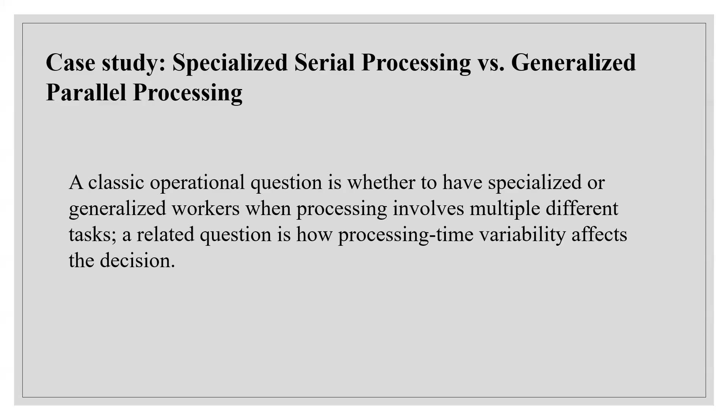Let's consider a loan application office, where applications arrive with exponentially distributed inter-arrival times with mean 1.25 hours. The first application arrives at time 0.

Initially, the system is empty and idle, and we will run for 160 hours. Output performance measures include the average and maximum total number of applications in process, and the average and maximum total time from entry to exit that applications spend in the system, as well as their time waiting for the next processing step to begin.

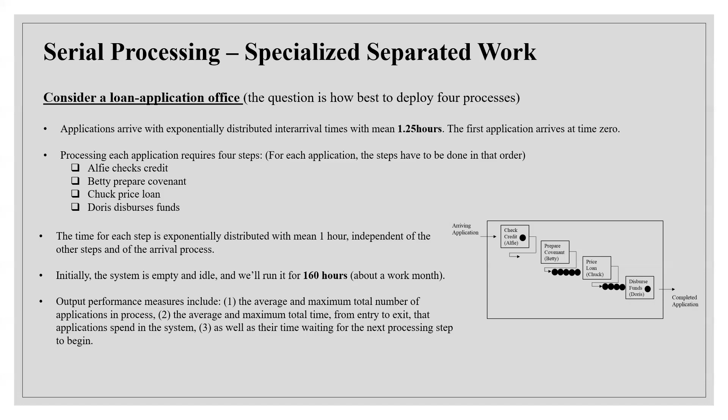So how do we use Arena software to simulate this process? Let's first open the Arena software.

As I mentioned before, the simulation always starts at the create module, so we drag the create module into the model window. Then double-click the create module.

First, we change the create module name to 'Application Arrives'. Then change the entity name to 'Application'.

Because we know that the applications arrive with exponentially distributed inter-arrival times with mean 1.25 hours, we set the type as Random Expo. The value is changed from 1 to 1.25, and the unit is hours. Finally, we click the OK button.

Next, we have to make sure that the entity name here should match the create module's entity name.

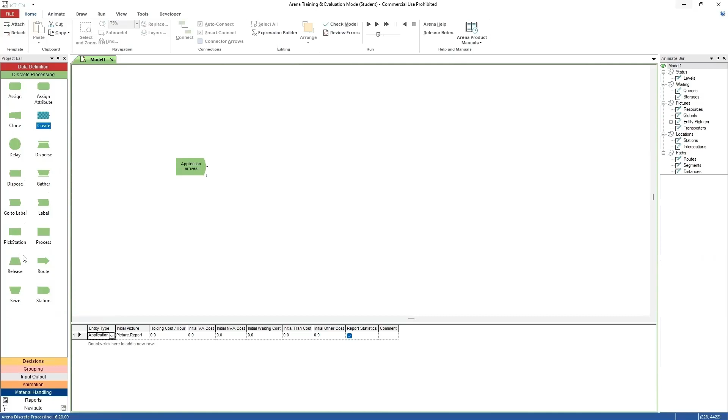Next, we drag the process module into the model window. Then click the Connect button to connect the create module with the process module. Then double-click the process module.

First, we change the name to 'Alfie Checks Credit'. Then set the action as Seize, Delay, and Release.

Later, we add the resource and change the name to Alfie, and select OK.

For the delay type, we know that for each step, the time is exponentially distributed with a mean of 1 hour, so the delay type is Expression. The unit is hours, and then we use the Build Expression tool, go to the random distribution, find the exponential, set the mean as 1, and select OK.

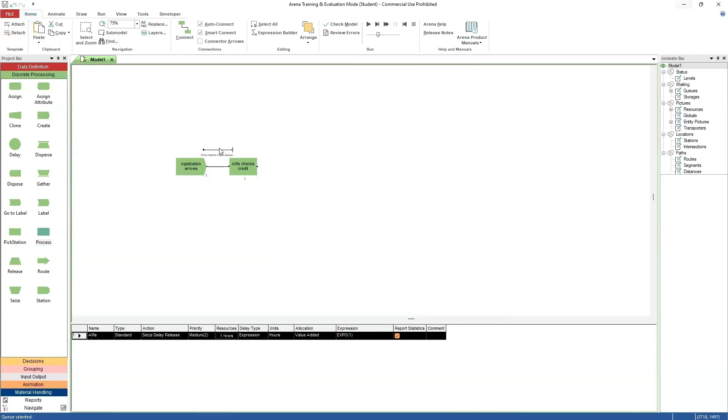Here, we can tune the queue position like this.

Let's go to the entity data module again. In this example, the default entity picture is a Picture.Report, which is fine, so we don't need to change the entity appearance.

The only appearance we need to change is for the resource, so we go to the animate toolbar, click the resource button, and tap the resource name Alfie.

We assume this process will never fail and will never be inactive. We use the green circle to represent idle, and the blue circle to represent busy.

Please always remember to click the seize area. Then click OK. Now, the Arena software asks us to decide the resource position, and we choose it here.

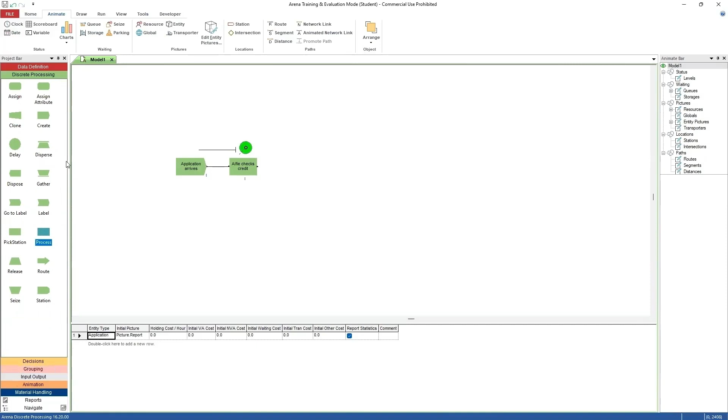Let's move to the second process. We first drag the process module into the model window again, then click the Connect button to connect the first process with the second process.

Next, double-click the process module. In this dialog, we first change the process name to 'Betty Prepares Covenant'.

Set the action as seize, delay, and release. Next, as the resource, we change the resource name to Betty. Click OK. For the delay tab, we choose use expression.

The unit keep as hours. We use the build expression button to find the random distribution. Choose exponential and set the mean value as 1. Okay.

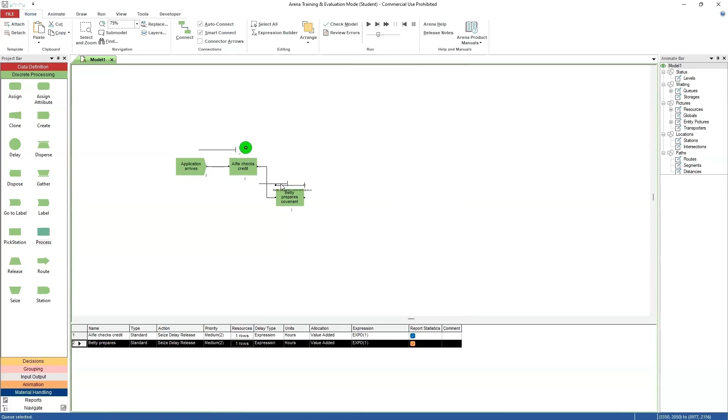Let's do the same thing for the third process. We drag the process module into the model window, then add the connection, and double-click the process module. In this dialog, we change the name to Chuck Prices Loan.

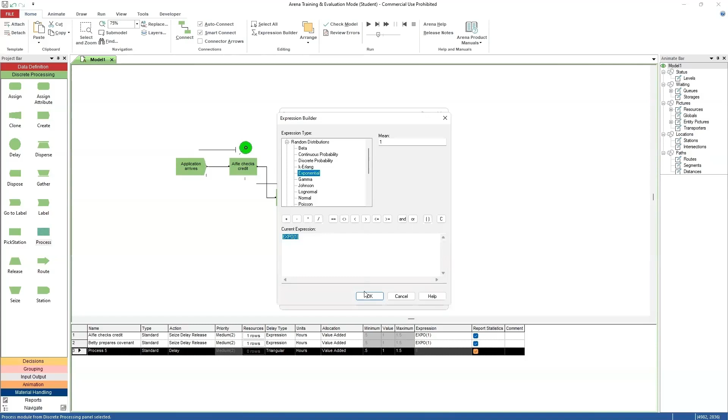Set the action as seize, delay, and release. Add the resource, change the resource name to Chuck. Click OK. For the delay tab, we choose expression and use the build expression button to find a random distribution. Finally, choose exponential, and we set the mean value as 1. Click OK and OK.

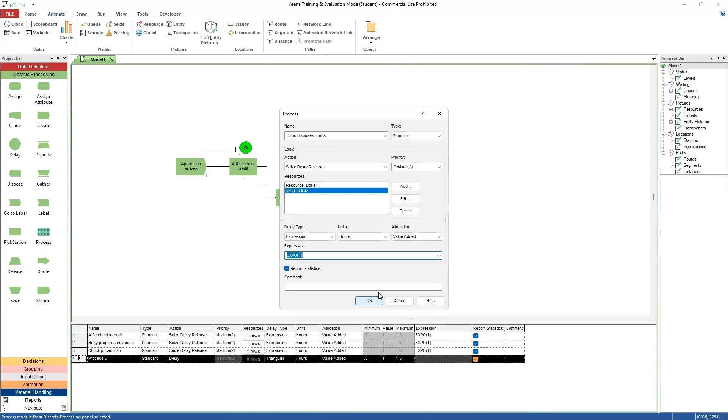So we do the same thing for the last process. Drag the process module and change the process name to disburse funds. Set the action as seize, delay, release, and add the resource and change the resource name to Doris. For the delay tab, change it to expression, find the exponential distribution, and change the mean value to 1. Set OK, OK.

Finally, drag the dispose module into the model window to end this flow chart. We first add the connection, then change the dispose name to application depart. Now the flowchart is ready.

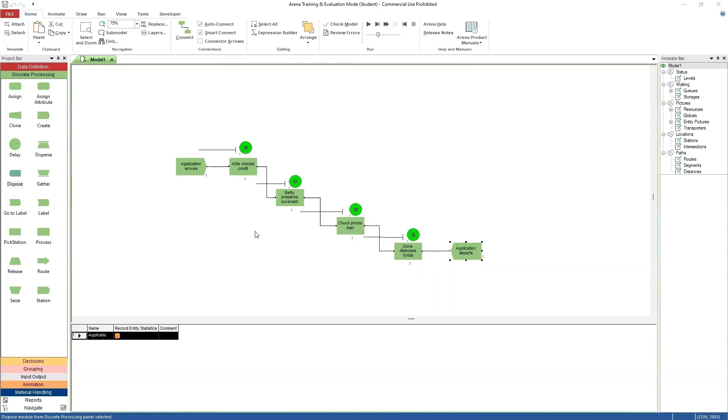Let's do one more thing: let's draw the dynamic plot. To draw it, we go to the Animate toolbar, then click the chart button to find the plot. We first add the series, then click this button and choose build expression, go to entity and choose number in process, and click OK.

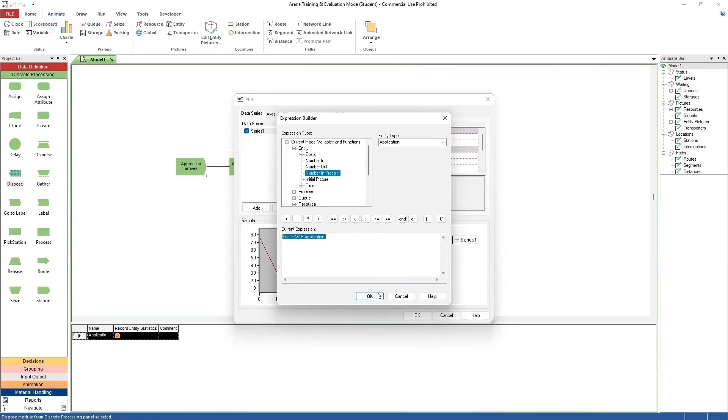We change the name to number in process. Because we don't want the legend, we will not let it show. For the axis, we let it be visible and change the name to time hour. Select the maximum value and change it to 160.

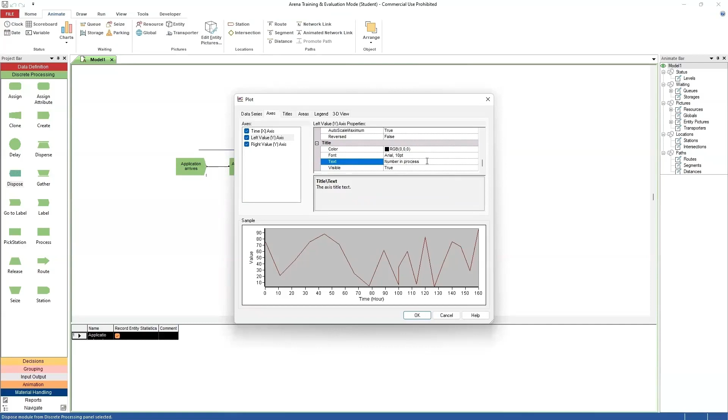We choose the y-axis and let it be visible, and change the label to number in process. Click OK. Now we have to decide its location. Put it here.

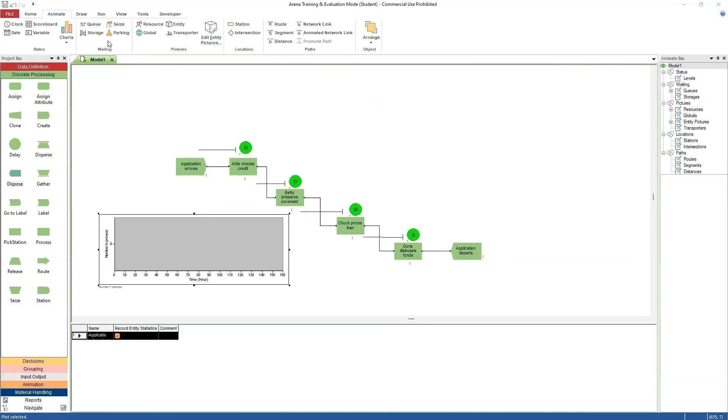Okay, everything is done. To run this simulation, we need to set some running conditions. So we go to the Run toolbar, then click the setup button. First we set the project parameters, then change the project title to loan application.

Next, go to the replication parameters. Change the length to 160, and make sure the time unit is hour. Let's go to the project parameters again. Please make sure that the process, this one, has been selected. Finally, we click OK, then run this simulation.

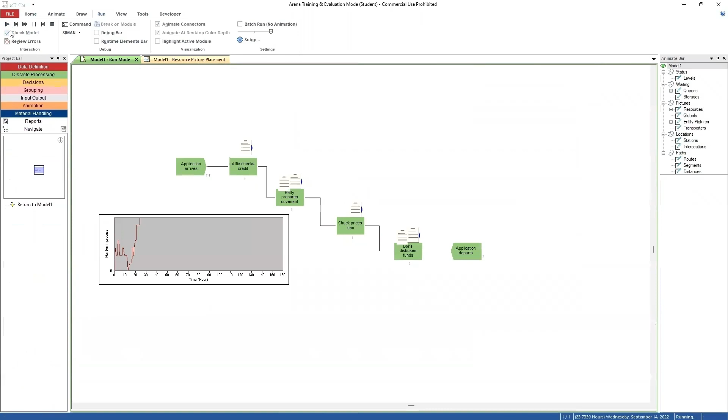Okay, let's click yes to see the result. This is how the report looks like. From the report, we can know that...

The average total time is 16 hours, and the maximum total time is 27 hours. Note that this counts only those applications that had left the system when the simulation stopped, not those that were still in process at that time.

And the average waiting time is around 12 hours, and the maximum waiting time is around 22 hours. Then go to this table. We know that during the 160 hours, 101 out of 170 applications were completed.

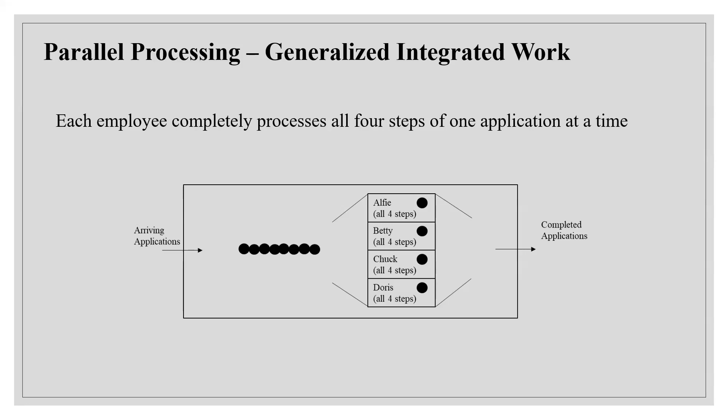First, we drag the create module into the model window, then change the name to application arrives. Then change the entity name to application, and set value to 1.25, keeping hour as the units. Then click OK. Next, drag the process module into the model window.

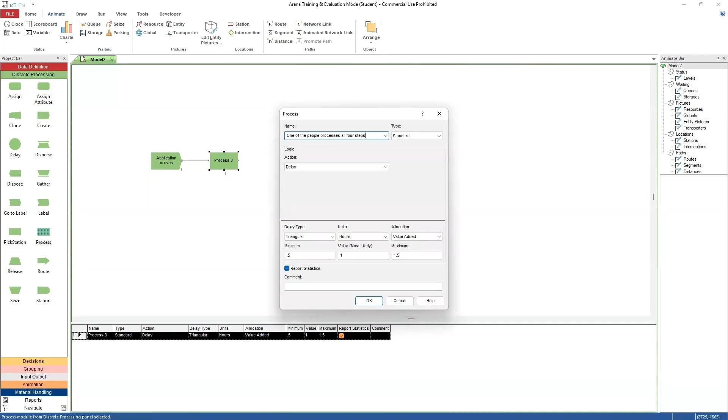Double-click the process module. First, we change the name to 'one of the people processes all 4 steps', and choose seize delay release. Add the resource, and you can change the resource name to loan officer.

And keep 1 as the unit to seize and release. This 1 represents the number of units of the loan officer resource that are seized and released by each application entity. Click OK. For the delay type, we use expression.

Each employee must complete all 4 steps before taking the next application out of queue, and each step requires 1 hour to complete. So we can simplify that as EXPO(1) plus EXPO(1) plus EXPO(1) plus EXPO(1), or you can also type 4 multiply by EXPO(1). Then click OK.

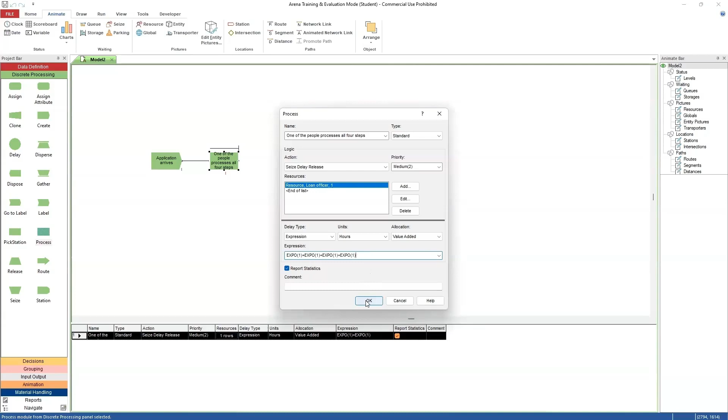Then tune the queue position. Let's add the resource animation. We type the resource name, loan officer, and we assume this process will never fail and will never go inactive. We do the same thing again. We use the green circle to represent idle and the blue circle to represent busy.

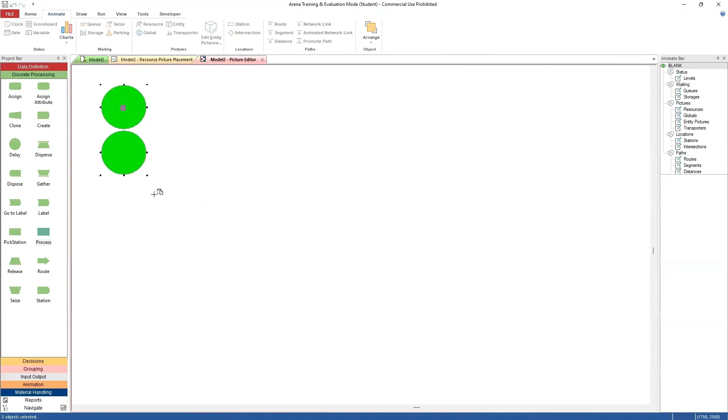Then we double-click the idle button, and first we select this green color, then duplicate it 3 times and line them up vertically. Now the software asks us to decide the location here. Then choose these 2 circles, copy and paste here. Next, we close this screen and do the same thing for the busy bar.

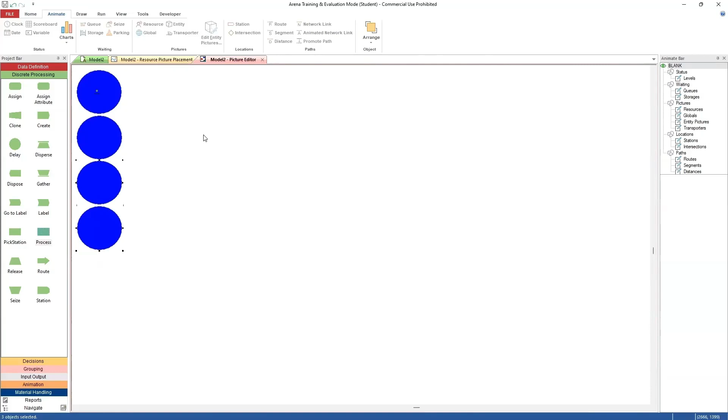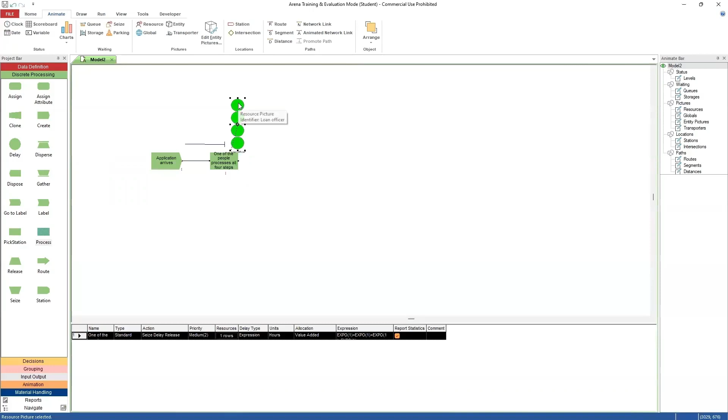First, select it, copy and paste. Then choose these 2 blue circles, copy, paste, and close this screen. Please select this area and select OK. Now Arena lets us decide the resource animation location. You can put it here and change the location this way.

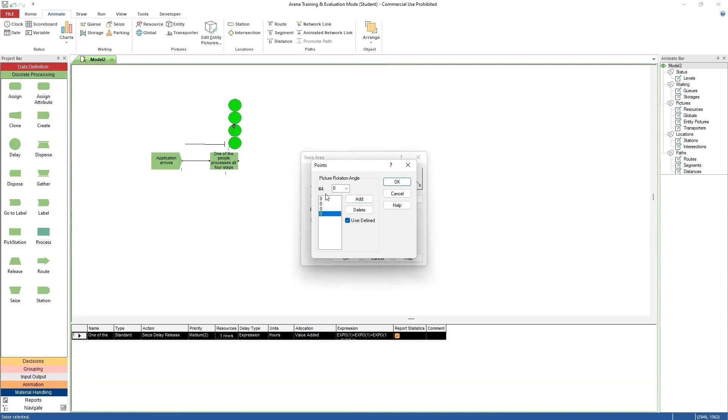Now, in this animation, it only has one seize area, but there exist 4 processes, so we have to duplicate this seize area 3 times. We double-click the seize area, choose the points button, and add 3 points. We can also click user-defined to change its angle, but in this example we will keep it as is. Then click OK and choose OK. Now you can see there are 4 seize areas, so we can drag them to each circle.

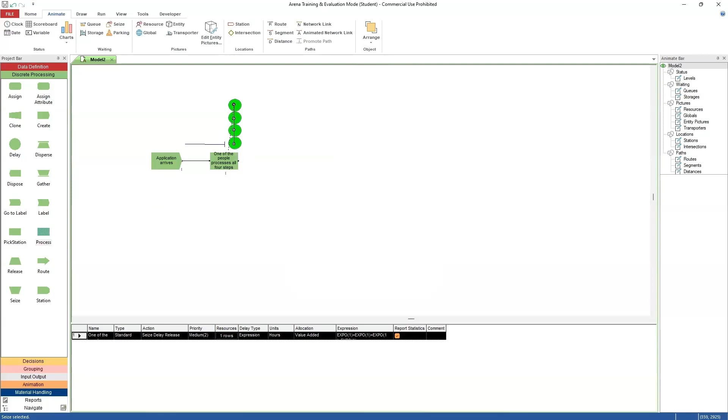Because we have 4 employees, we have to go to the data definition bar and choose the resource data module, and for the capacity, we change 1 to 4.

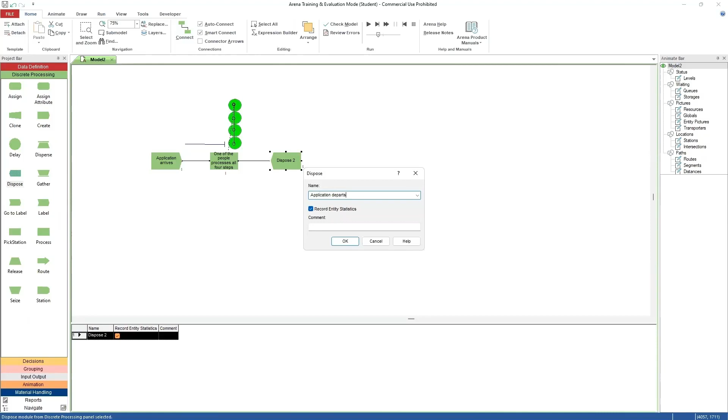Finally, we drag the dispose module into the model window, then add the connection, and change the name to application departs. Click OK. Before running this simulation, we have to set some conditions.

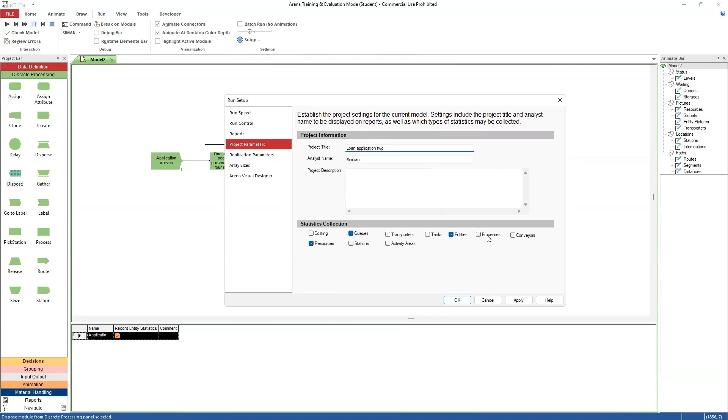So we go to the run bar and set up. In the project parameters, we change the name to loan application 2, and make sure that the process has been selected. In the replication parameters, we change the replication length to 160, and we should make sure that the time unit is hour. Then click OK. Let's run this simulation.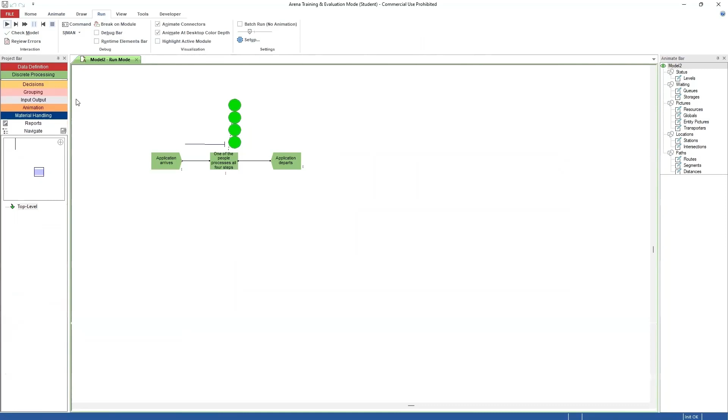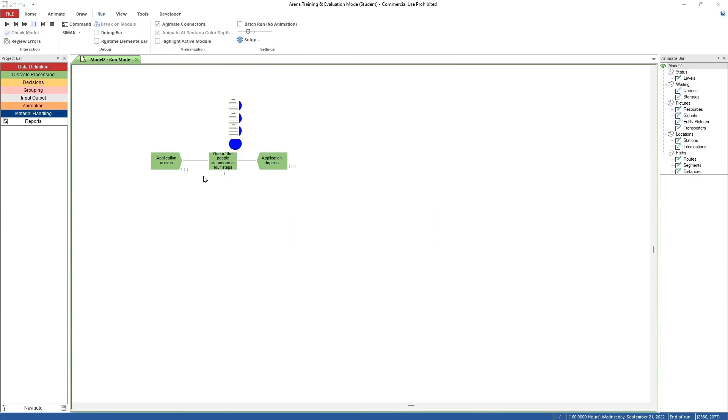Okay, let's run this simulation. Now the report is ready. Let's click yes to see the result. This is how the report looks like.

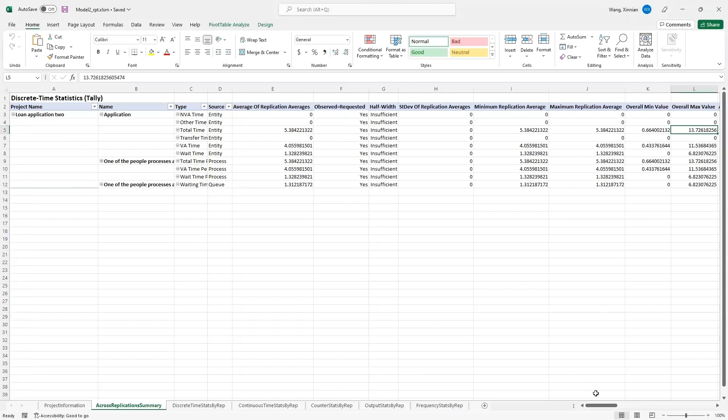We see that the average waiting time is around 1.32 hours, and the maximum value is about 6.8 hours. The total time average value is 5 hours, and the maximum value is about 13 hours. Compared with the previous case, this value is much smaller. Then go to this table, and we can find that during 160 hours, there were 165 applications completed.